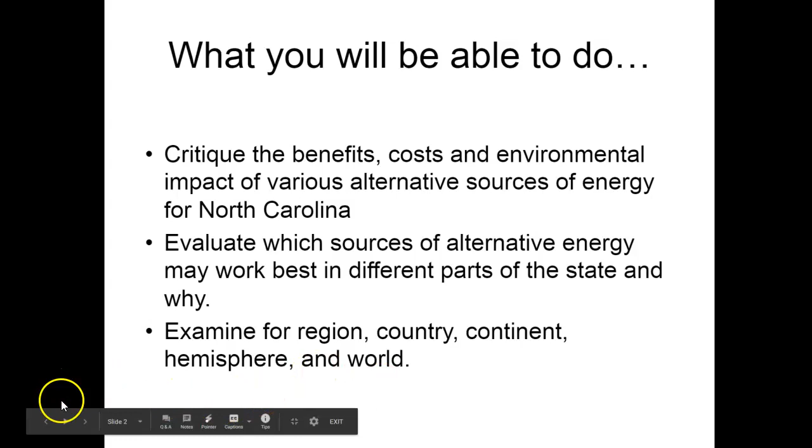This is what you should be able to do when we finish these: critique the benefits, costs, and environmental impact of various alternative sources of energy for North Carolina; evaluate which source of alternative energy may work best in different parts of the state and why; and examine a region, country, continent, hemisphere, and world. We're concentrating mainly on 1 and 2 as we combine these lessons.

In the previous lesson, we looked at fossil fuels, which are non-renewable resources that can cause multiple types of pollution. Fossil fuels came from sedimentary rock. The types we looked at specifically were natural gas and oil, which are drilled for, and coal, which is mined for. We also looked at some other types of natural resources that were not exactly fossil fuels. We looked at peat, which is a process before coal becomes coal. We end up with peat. And we also looked at nuclear energy as well.

If you remember in that video, we said that we're going to have to come up with different ways. We're going to run out of fossil fuels, not only as a country in the U.S., but also globally. So we have to come up with something different, and that's where alternative energy comes into place. Alternative is something else. So if you don't have a pen, you write with a pencil - that's an alternative. It's another choice you can use for energy.

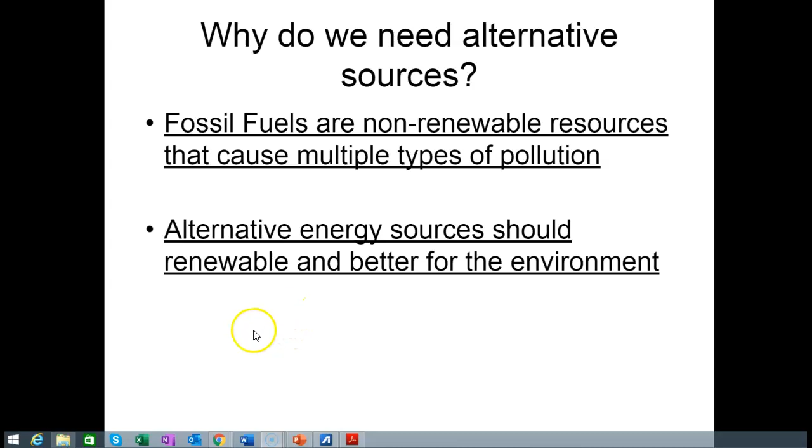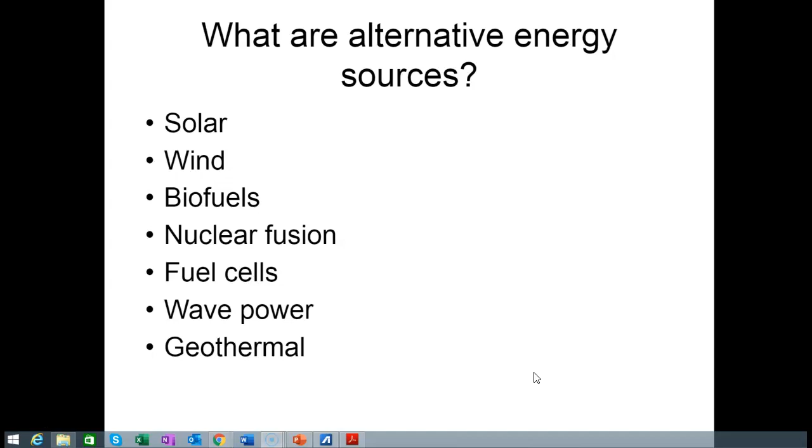These sources are renewable, so within our lifetime they can be replenished. They are also better for the environment. The types we're going to look at for alternative energy are solar, wind, biofuels, nuclear fusion - which is different from the nuclear fission we learned earlier, because nuclear fission was a non-renewable resource even though it was a natural resource - fuel cells, wave power, and geothermal.

Solar energy comes from the sun. This is a good thing because the sun is free. The benefits are that it's renewable - the sun is shining every day, or even though clouds may block it, we have the sun every day. It is also clean - there's no pollution given off - and it's quiet.

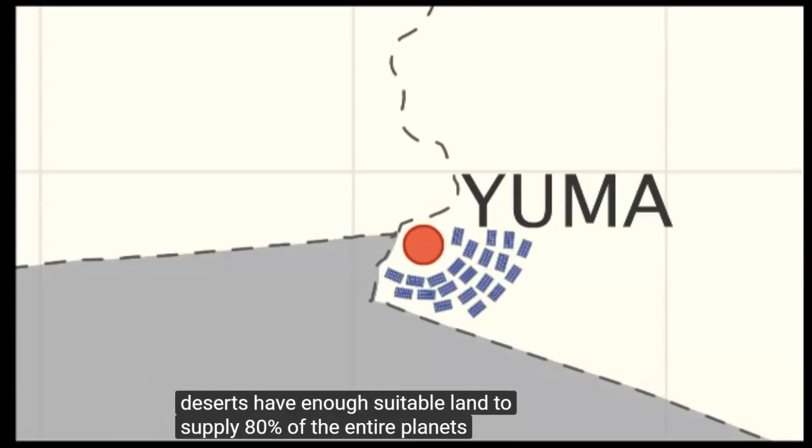The sun has produced energy for billions of years and naturally energizes all of the plants on the planet. These plants give energy to animals and power the human body. This is done by a process called photosynthesis.

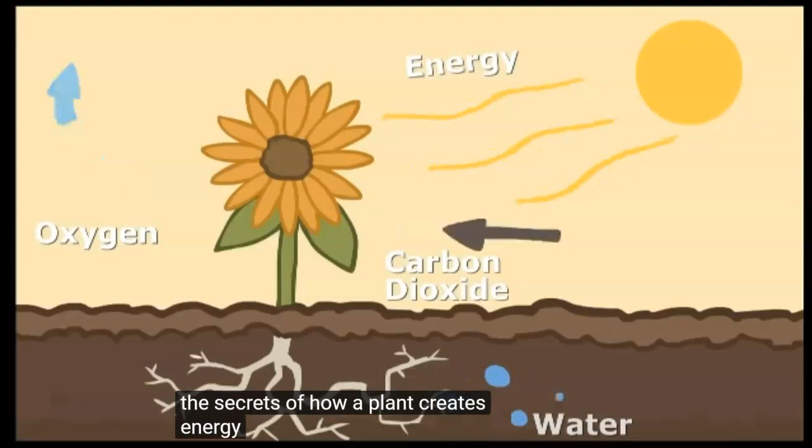For decades now, scientists have unlocked the secrets of how a plant creates energy through photosynthesis and can duplicate that process using modern technology and silicon. This process of creating electricity from the sun can power our homes and cities.

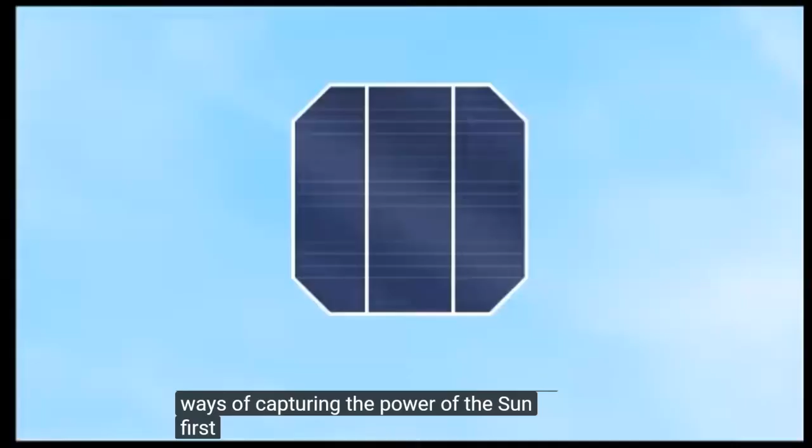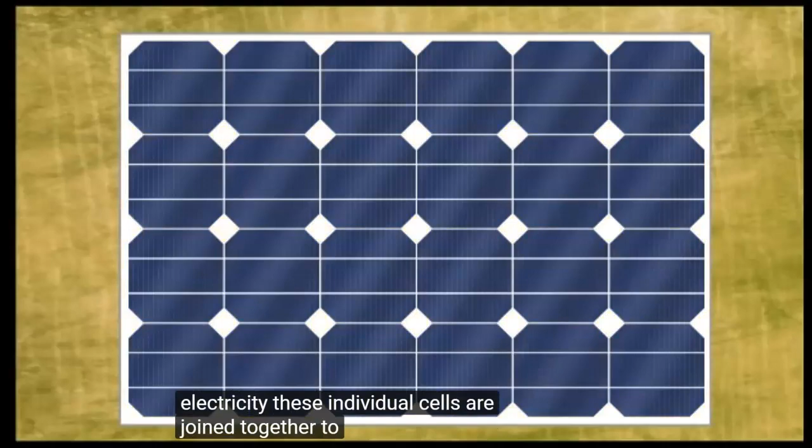There are two ways of capturing the power of the sun. First is photovoltaic devices, more commonly known as solar cells. They change sunlight directly into electricity. These individual cells are joined together to make solar panels. These can be placed on rooftops, calculators, and even on large-scale fields covering many acres to power cities.

Solar energy systems produce no air pollutants or carbon dioxide. And because they can be placed on top of existing buildings, they do not require extra land for power plants. Another way to capture the sun's energy is by capturing its heat.

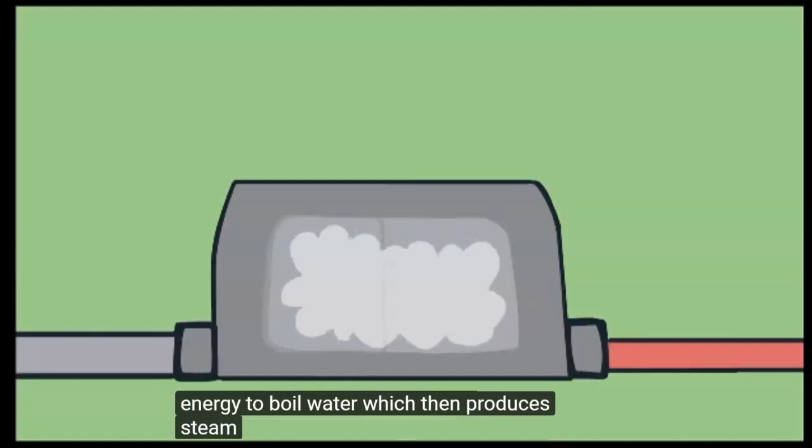Solar thermal-electric power plants generate electricity by concentrating solar energy to boil water, which then produces steam. This steam turns a turbine, which moves a generator to produce electricity. Solar thermal-electric plants consist of fields of mirrors to reflect the concentrated sunlight onto a receiver. The receiver then collects the solar energy and converts it to heat.

The production of energy from solar thermal plants works essentially the same as fossil fuel power plants. But instead of producing steam from burning fossil fuels, the steam is made by the sun. The only downside to this technology is that the power only exists as long as the sun is up. To help solve this problem, other forms of solar technology have been explored.

Scientists are currently working on methods to store this energy for cloudy days and nighttime. One way to conquer this problem is building new power plants that combine a multitude of renewable energy sources. Using solar power, wind power, and biogas could do this. When one method is not creating electricity, the other could take over. Other methods, such as storing excess power in batteries, could also be a possible future for solar technology.

This is an example of our next alternative energy: wind. Looking at the bottom of the screen, you see windmills. The windmills are high, they're very tall. We're trying to harness as much of the wind uninterrupted as we can, so that's one of the main reasons they're built that way. And they have blades, called blades. I want you to think of these blades right here.

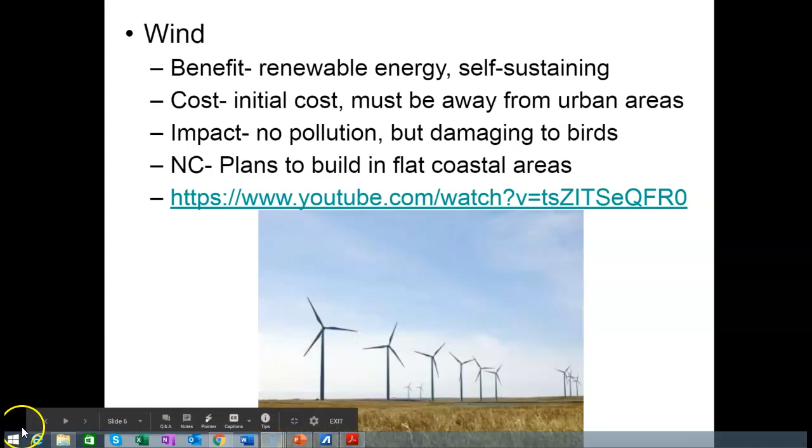We've all seen those creaky old windmills on farms, and although they may seem about as low-tech as you can get, those old windmills are the predecessors for new modern wind turbines that generate electricity. The same wind that used to pump water for cattle is now turning giant wind turbines to power cities and homes.

Okay, have a look at this wind farm in the California desert. A hot desert next to tall mountains, an ideal place for a lot of wind. Here's another one on the windy prairies of Wyoming.

Now, today's wind turbines are much more complicated machines than the old prairie windmills, but the principle is the same. Both capture the wind's energy.

Okay, here's how it works. First, a wind turbine blade works sort of like an airplane wing. Blowing air passes around both sides of the blade. The shape of the blade causes the air pressure to be uneven, higher on one side of the blade and lower on the other. And that's what makes it spin.

The uneven pressure causes the blades to spin around the center of the turbine. On the top, there's a weather vane that's connected to a computer to keep the turbine turned into the wind so it captures the most energy.

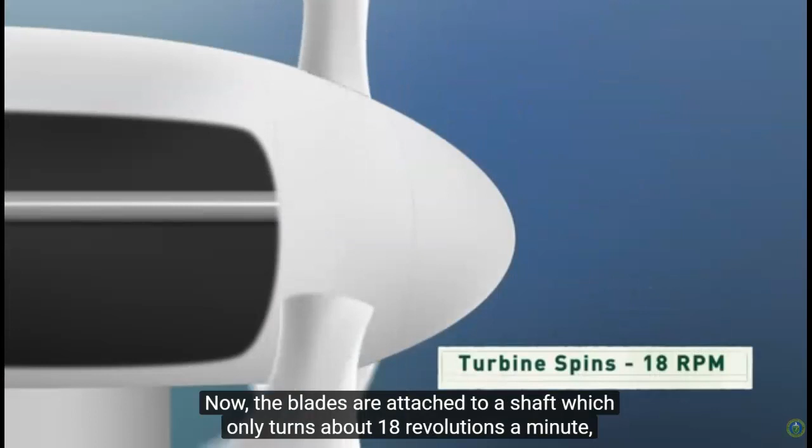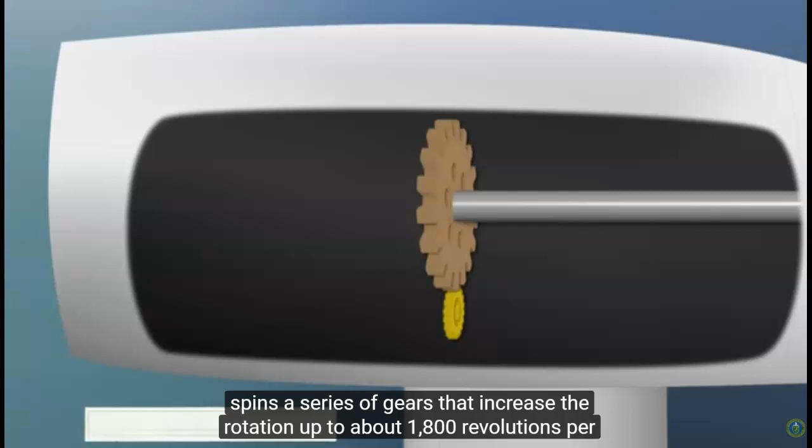Now the blades are attached to a shaft, which only turns about 18 revolutions a minute, and that's not nearly fast enough to generate electricity by itself. So the rotor shaft spins a series of gears that increase the rotation up to about 1,800 revolutions per minute. And at that speed, the generator can produce a lot of electricity.

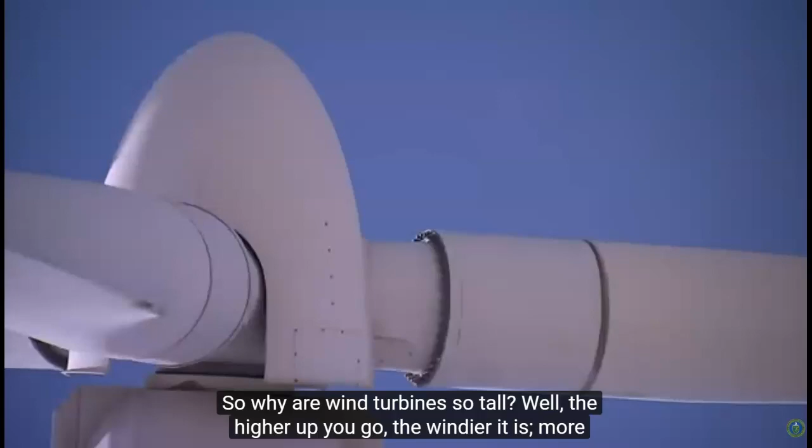So, why are wind turbines so tall? Well, the higher up you go, the windier it is. More wind naturally means more electricity. And in many cases, larger turbines can also capture wind energy more efficiently. The blades can sweep a circle in the sky as long as a football field.

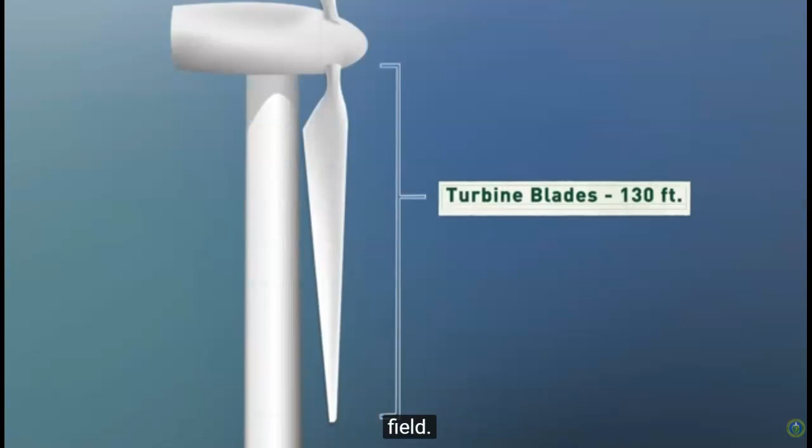Now, what's really cool is that even a small wind farm, like this one in Wyoming, can generate enough electricity to power more than 9,000 homes. And larger farms can provide much more clean energy for our homes and businesses.

Now, with biofuels, this is our next one. Bio means life, fuels means energy. So what kind of energy can we get from life? And I know that's many energies, but specifically looking for powering something.

Typically corn is used, and there are actually places, farms that get paid. The government pays them to grow corn for biofuels as an alternative energy. And if you take AP Environmental with me, this is one of the discussions that we have: should you be raising the corn to feed those in poverty, or should you be raising the corn to create biofuels? We won't get into that one here in 9th grade, or in Earth Environmental, regular at this level.

So here are some benefits of biofuels. It replaces your regular fossil fuels, and it's renewable. That's a humongous benefit. The cost is cheap, and you can reuse the oils.

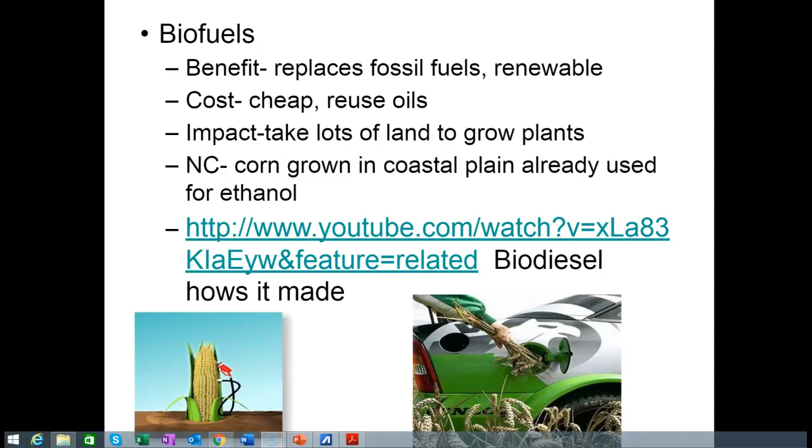Now I want to take a quick look at this video. How is that biodiesel made?

Now as we watch this video, this is an older video. Things have changed as far as updates that have been made, but for the most part, it gives you the general information still that we need.

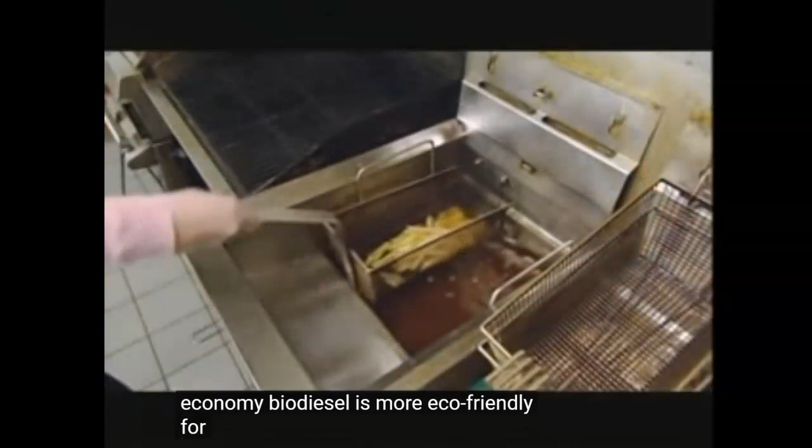If your car has a diesel engine, it can run on biodiesel fuel, usually without requiring any modifications. While biodiesel and petroleum diesel are similar in energy efficiency and fuel economy, biodiesel is more eco-friendly. For starters, it can be made from what would otherwise have been waste, for example, from vegetable oil of your local fast food joint.

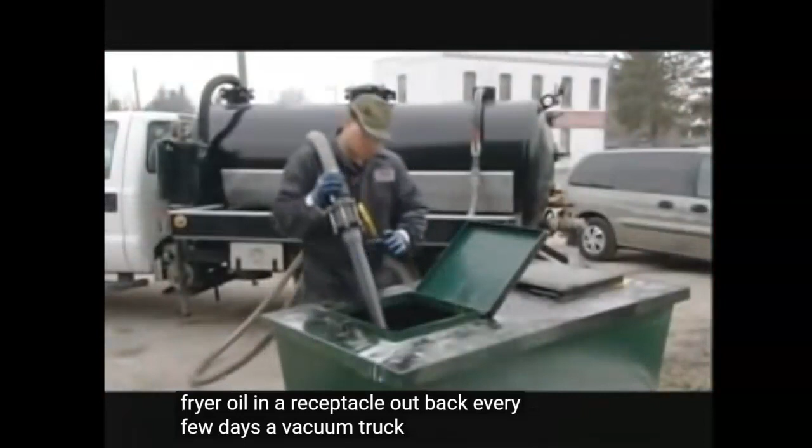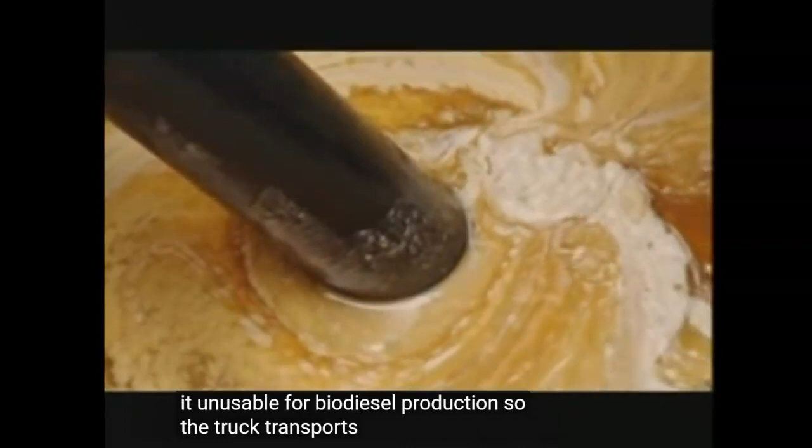The restaurant simply discards its used fryer oil in a receptacle out back. Every few days, a vacuum truck comes by to collect it. In its current state, the oil contains water and food particles, making it unusable for biodiesel production, so the truck transports it to a filtering plant. There, they pump the oil into a holding tank, then heat it up to dry out the water.

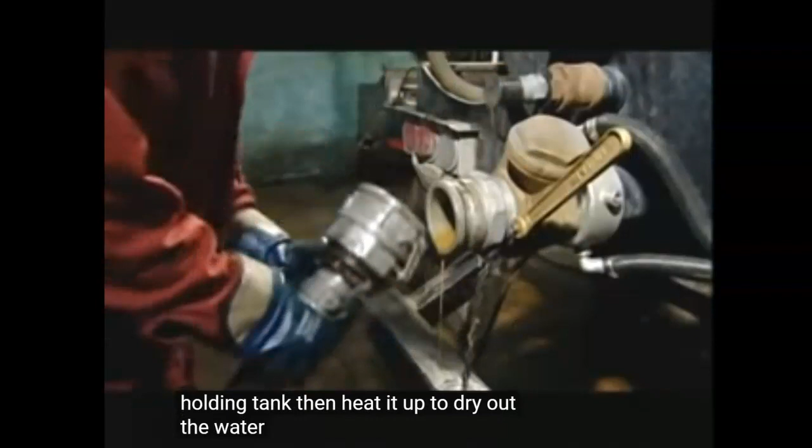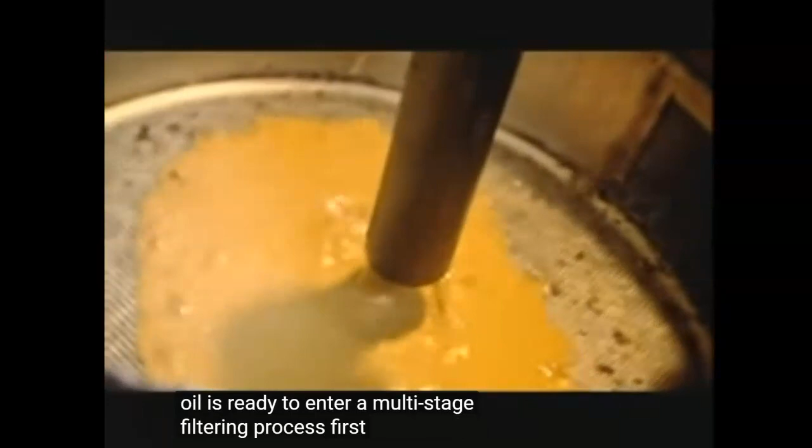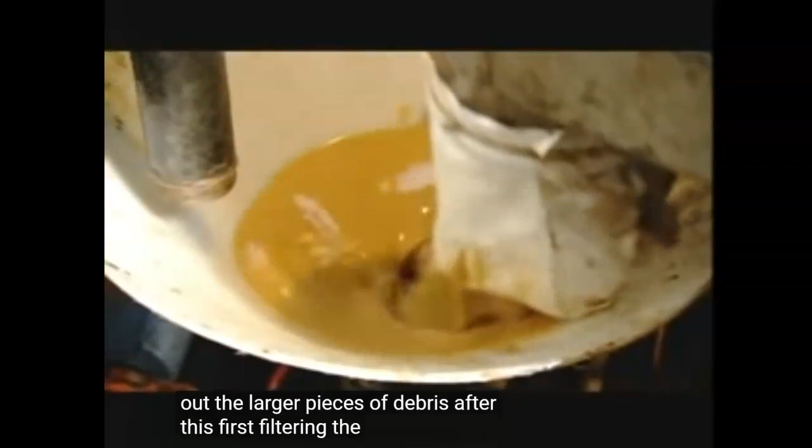Once they drain the water, the oil is ready to enter a multi-stage filtering process. First, the oil goes through a vibrating sieve, which strains out the larger pieces of debris. After this first filtering, the oil is already visibly cleaner.

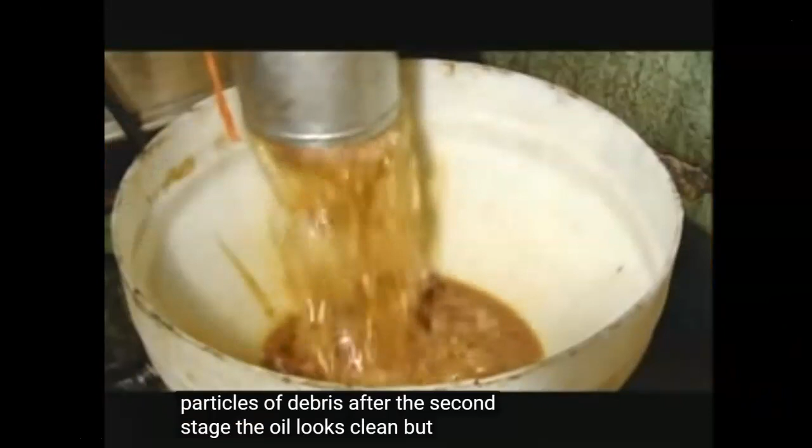Next, it passes through a second vibrating sieve. This one has a finer mesh, therefore it catches smaller particles of debris. After the second stage, the oil looks clean, but still contains microscopic debris.

So it enters the third and final filtering stage, passing through 20 ultrafine filter cloths, which trap any particles larger than 1 micron in size. A micron is about 80 times smaller than the width of a human hair. The captured debris leaves a muddy residue on the filters.

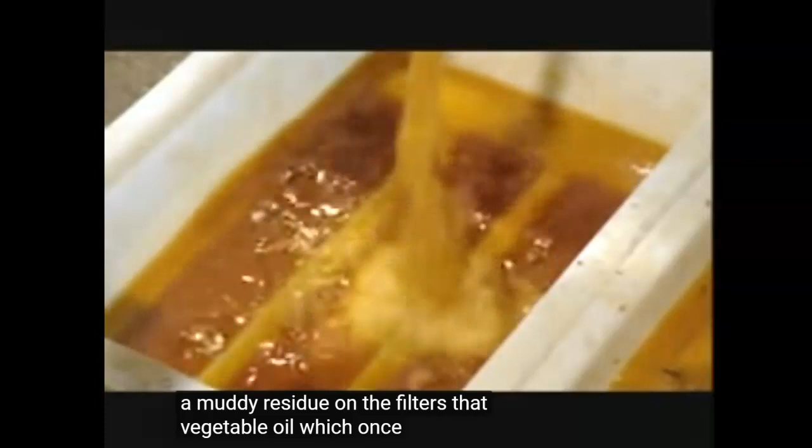That vegetable oil which once deep-fried potatoes is now ready to cook up some biodiesel fuel.

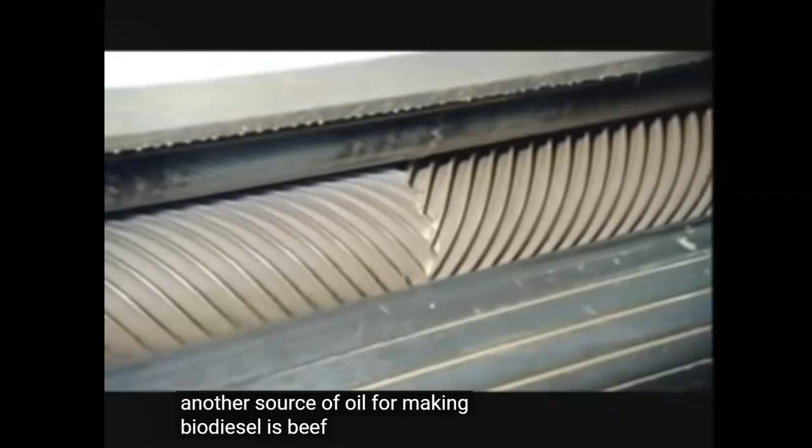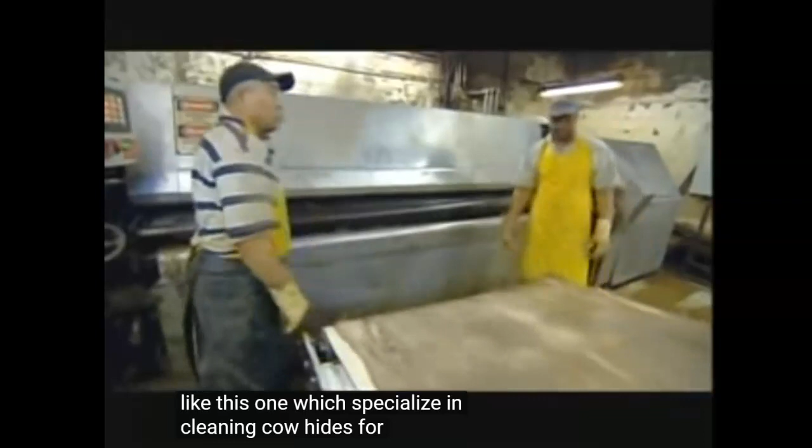Another source of oil for making biodiesel is beef tallow, oil derived from cow fat. Biodiesel producers typically buy tallow from facilities like this one, which specialize in cleaning cow hides for leather tanneries. Sharp revolving blades shear off the fat from the back of the hide.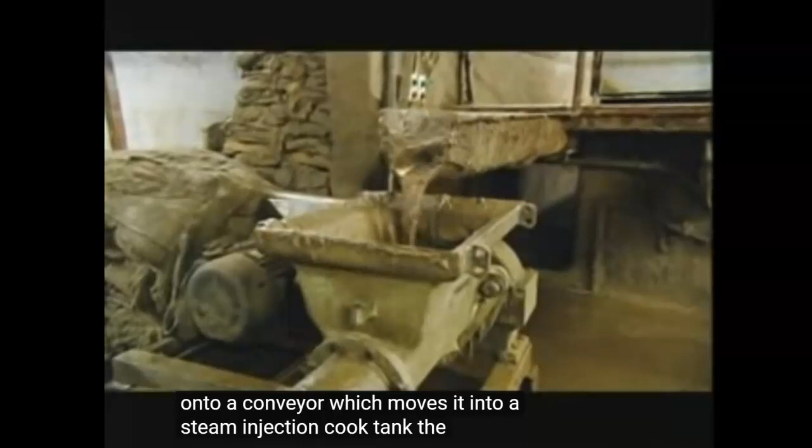The fat drops onto a conveyor, which moves it into a steam injection cook tank. The tank heats the fat to a gentle boil, extracting the oil. Everything else leaves the tank and drops into a waste container. The oil moves onward, passing through a two-stage filtration process.

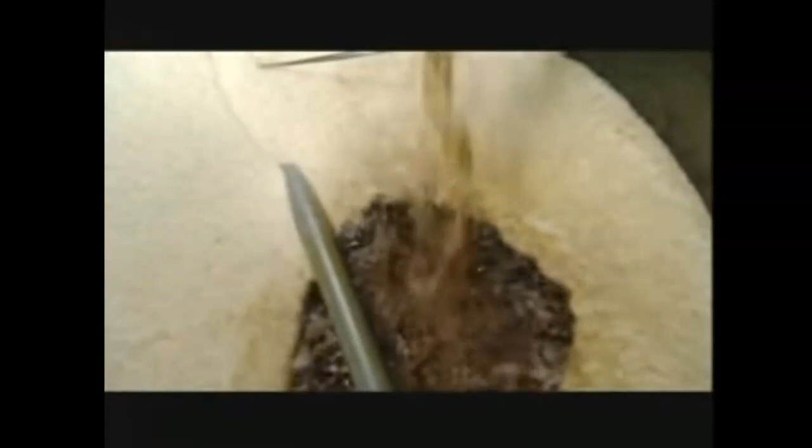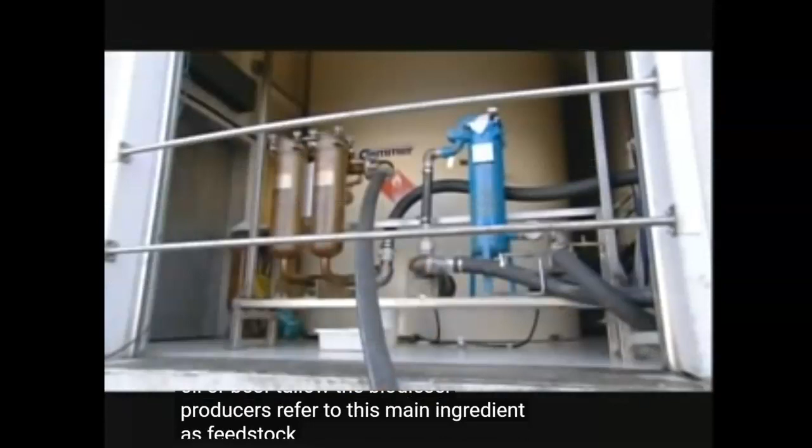Whether the raw material is vegetable oil or beef tallow, biodiesel producers refer to this main ingredient as feedstock. When the feedstock arrives at the biodiesel plant, it goes into a holding tank until production time.

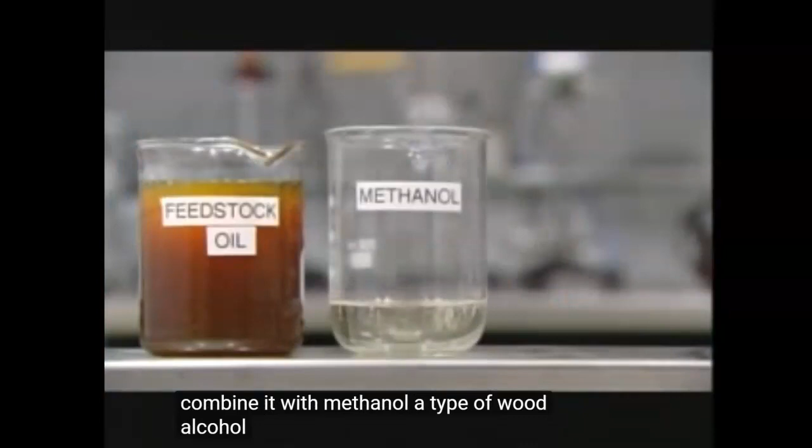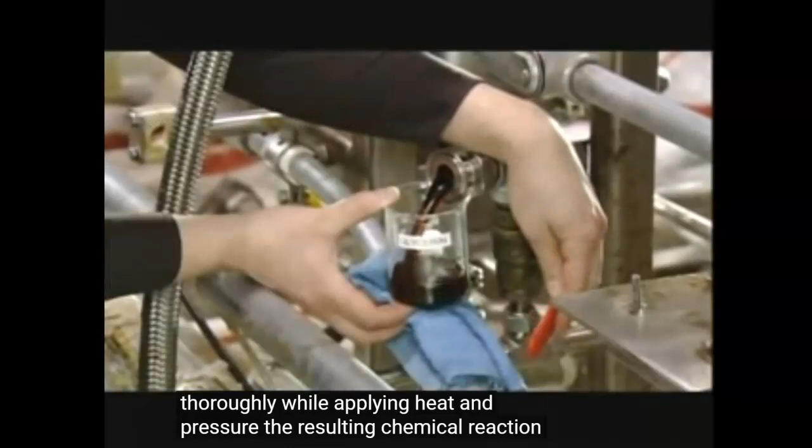This demonstration illustrates the production recipe. They take the feedstock and combine it with methanol, a type of wood alcohol, as well as with a catalyst, which triggers a chemical reaction. A processing unit mixes everything thoroughly while applying heat and pressure. The resulting chemical reaction produces a harmless byproduct, glycerin, a common ingredient in soaps and cosmetics.

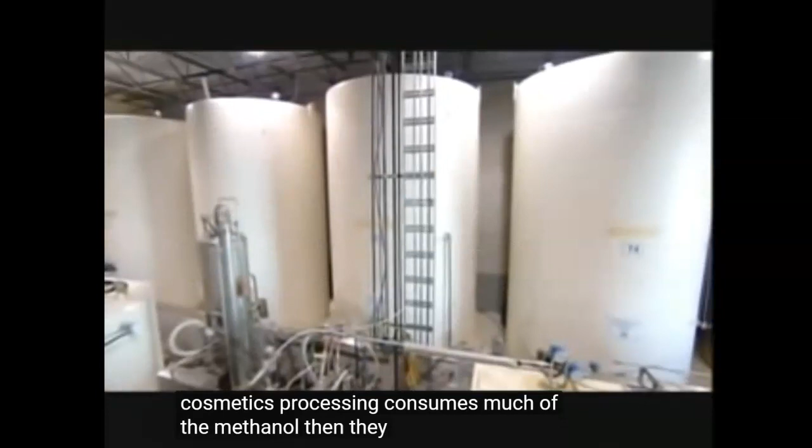Processing consumes much of the methanol. Then they remove even more, leaving just a tiny percentage of it in the finished biodiesel.

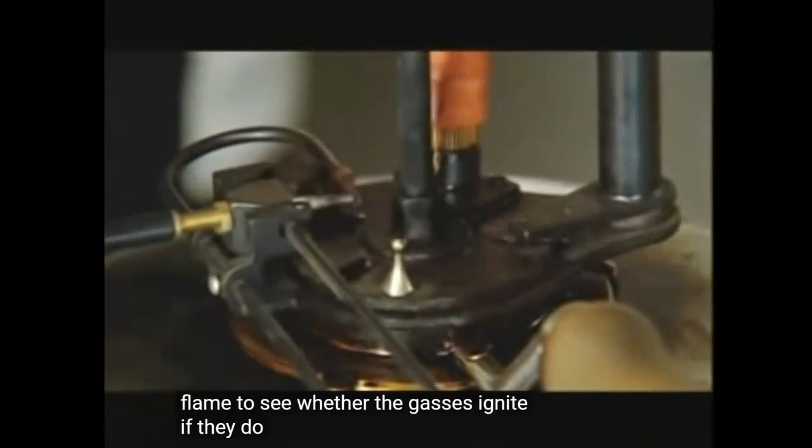To ensure their fuel meets international regulatory standards, the plant's quality control lab tests samples from each production run. In this flammability test, they heat the fuel to 135 degrees Celsius, then apply a flame to see whether the gases ignite. If they do, they have to remove more methanol to make the fuel safe. If they don't ignite, the fuel meets international safety standards.

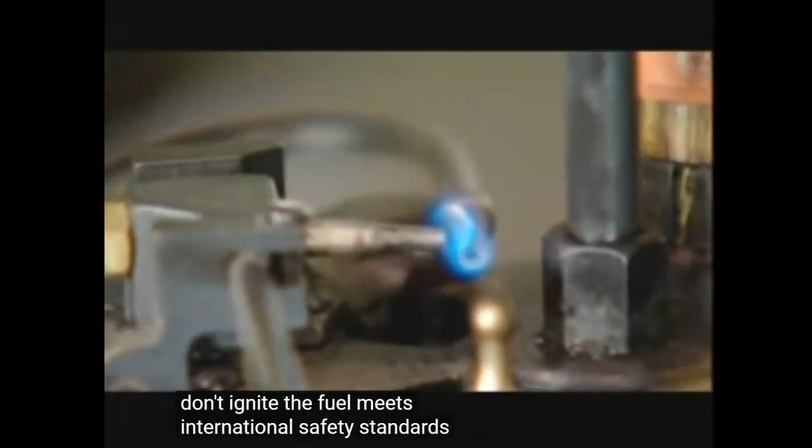Biodiesel costs more at the pump, but emits significantly less carbon dioxide and monoxide, and 85% fewer cancer-causing agents into the air we breathe.

Now, nuclear fusion is different from fission. With fission, it's dividing, okay? And with fusion, it's putting it together. So fuse energy drinks, for example, is an example of when they put two different things together, they fuse them together to create something else.

Now, the benefits of using nuclear fusion is that it is a renewable resource, and it also reduces carbon. So those are really good things that we have.

Unfortunately, it is very expensive to start up, so that is definitely an issue. And getting rid of waste, when you have to get rid of the waste, it takes monitoring. So basically, after you've gotten everything that you wanted out of it, you have to actually monitor it for up to 10,000 years. It could still be nuclear.

The impact, there's always impact or opportunities for disaster. And we have had some of those disasters with nuclear energy. One of the ones you may have not heard about is Chernobyl. That was one, and you guys might want to look that up, watch the video for that one. But the one that happened in your lifetime, Fukushima, Japan, is actually one of the worst ones that happened, and I think that one is recorded as one of the worst ones in history. So actually both of those are. You're going to watch a video on that on your own time at another time.

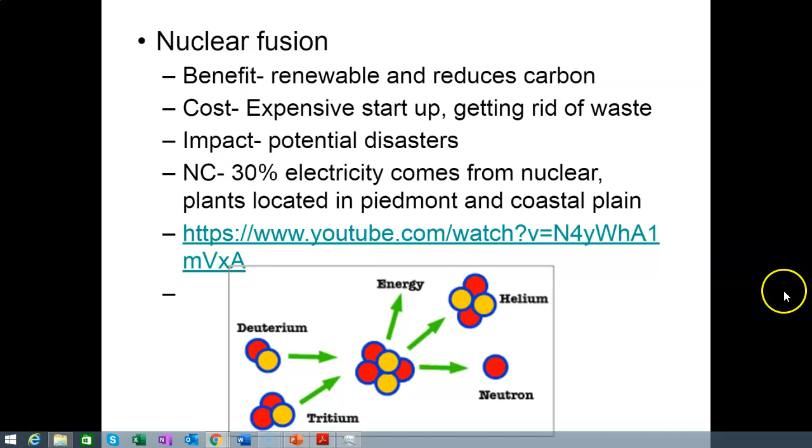In North Carolina, 30% of the electricity comes from nuclear plants. They are located in the Piedmont and the coastal regions. Let's see if we can pull back up our map. Doesn't look like we can. That's okay, just remember where the Piedmont and coastal regions were.

When we talk about nuclear disasters, we typically use the term nuclear meltdown. So here's a quick recap that was after the disaster in Japan. Had to look at the date of this one again, and they'll explain to you a little bit about what it means to have a nuclear meltdown.

The government now says 2 reactors are in partial meltdown and 4 more are at risk.

They're warning that another explosion similar to the one we saw yesterday could be imminent. They say they're doing everything they can to contain the damage before any radiation is released. But 170,000 people have been evacuated from the areas around the facilities.

Now, I want to say the word meltdown is being used a lot these days. It is a loaded and scary term, so we want to be absolutely clear about what it actually means. Ron Claiborne is here with a quick explanation of what exactly happens when a nuclear reactor melts down. Ron? All right, Dan, let's start with a simple graphic of a nuclear reactor.

Normally the uranium core, the potentially dangerous part of the plant, is immersed in a coolant. That is usually water, constantly being pumped in and out to keep the core cool. When the earthquake struck in Japan, those pumps went down. The uranium core then had nothing to keep it cool, so it began heating up, boiling off that water. And if that water eventually boils away, it exposes the core, and that's when the real trouble starts.

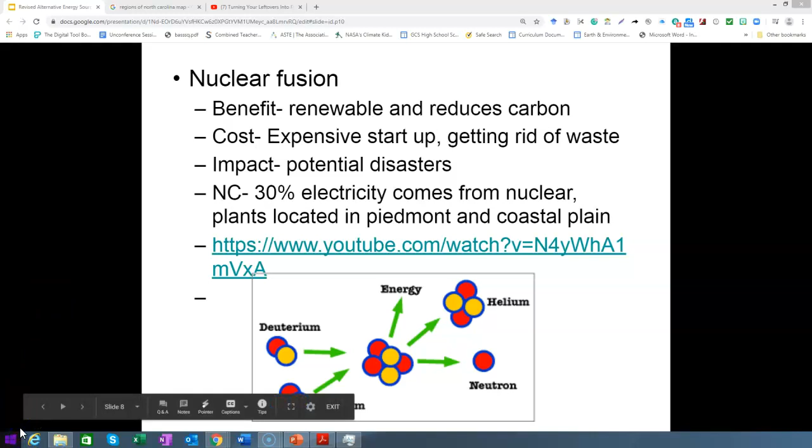Whoopsie guys, me and this computer are not being great friends right now.

Remember what we talked about: waves can be in any large body of water. So if you have a large lake, you can have waves as well. We only really think about tides and waves referring to the ocean, but the tides and waves can be in any large body of water.

So some downsides are it's a high startup cost and it has lots of regulations, because remember, technically nobody owns the ocean. So the state has to put down some regulations to ensure that at least the environment is safe. It is damaging to fish and wildlife, which means you have to create some kind of barriers in between.

Think about when dams are built, and there is a separation in the water, basically. You have some things on one side and some things on the other. So it will disturb their natural habitat.

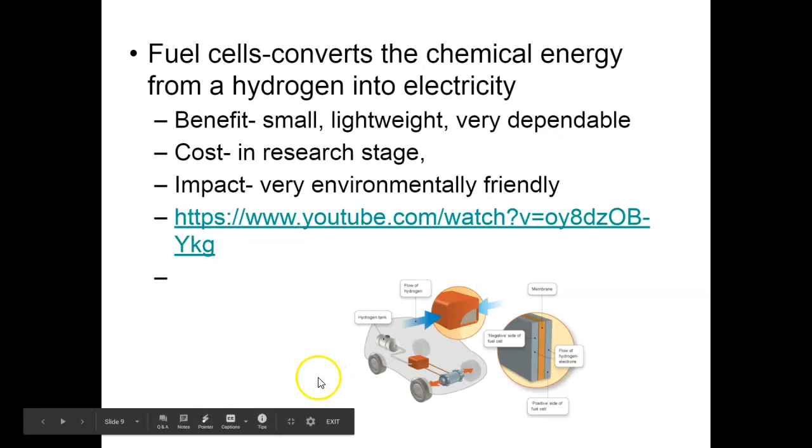All right, ladies and gents, these are some videos, again, to watch on your own at some point for a little added information. But for this video, for right now, that is all, video lesson, that is all I am showing you. Again, videos on your own.